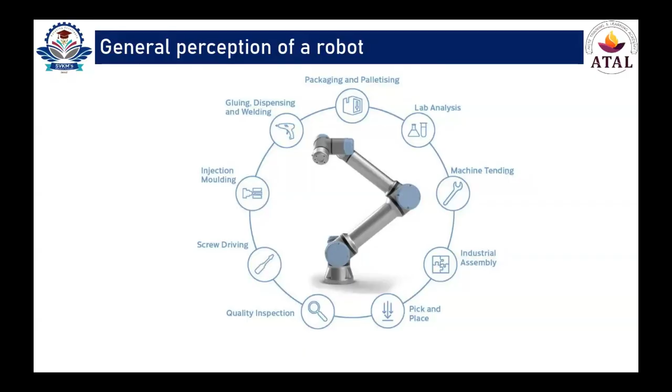The reason is that we humans are a particular kind of fish, a selfish kind of fish. We are very much selfish about improving the productivity, improving business operations, and ultimately improving the profits. And that's why we are studying these technologies even today, and that's why they are relevant even today, even if it is a technology of old ages.

All the corporations are trying to reduce the cost of production and improve the productivity of the workers or overall work environment, consequently increasing the profits. So that's why they are focusing on these technologies. But why now? Because now there is support from the intellectual community in terms of hardware upgradation or software upgradation, and the technical and economic viability of such solutions. That's why this particular science is gaining momentum.

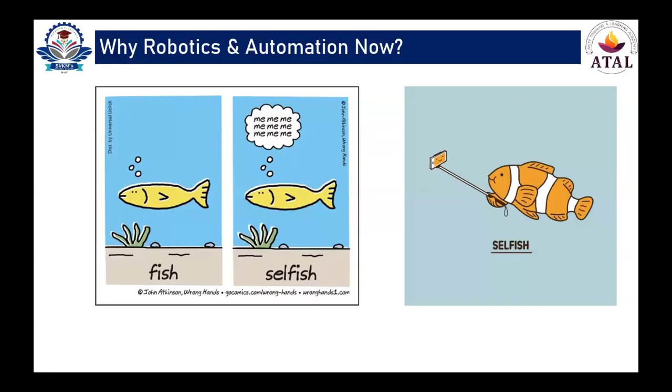If we talk from an industrial or market development perspective, the industrial robot market is now booming at the rate of about 14.2%, as identified by Fortune Business Insights. So progressively, it is supposed to go from the present value of about $20 billion to about $55 billion in 2032. Mainly, this is supported due to the rise in the logistics sector.

We humans are becoming more and more consumers. We are consuming so much, as can be seen from our orders on Amazon, Flipkart, Zepto, Blinkit. And because of that, this technology has been benefited directly and indirectly.

When we talk about industry development, ABB has introduced a new IRB 1090 education robot, which has been particularly designed so that employees can be trained in industrial plants, so that their employees can have a competitive advantage. Everybody has understood the technology game, that whoever has the better piece of technology will excel in the market. So that's why everybody is trying to train their manpower as well.

When we talk about various applications, they can be pick and place, welding and soldering, material handling, assembling, cutting and processing, as well as other applications.

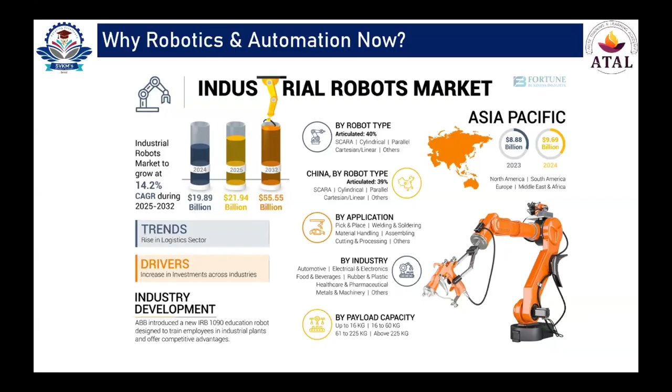At the end of the day, it's the profit that matters for the organizations. So they want to enhance their productivity by deploying a mechanism which will follow rules and principles. And that's why robotics is advantageous.

First of all, it will reduce the cycle time, which you can always optimize. It is not prone to human errors. It will provide better production accuracy, and also better precision.

Just a few moments ago, we said whenever there are repetitive tasks, robots can really help replace the workers, because the human mind has a tendency of making errors when tasks are repeated a few more times. To achieve better precision, particularly in an industrial environment where a mistake can cost money, as well as in certain scenarios even cost lives, robotics is beneficial.

When the parameters of the production or application are set, the robots are much better able to achieve the accuracy.

Then the robots, when trained with AI models which are the buzz nowadays, can be very helpful to ensure decision making is based on the data which is available, instead of the judgment of a person, or cognitive biases, or the thought process of the person. So that rational decision making will definitely help in improving the productivity of the organization as a whole.

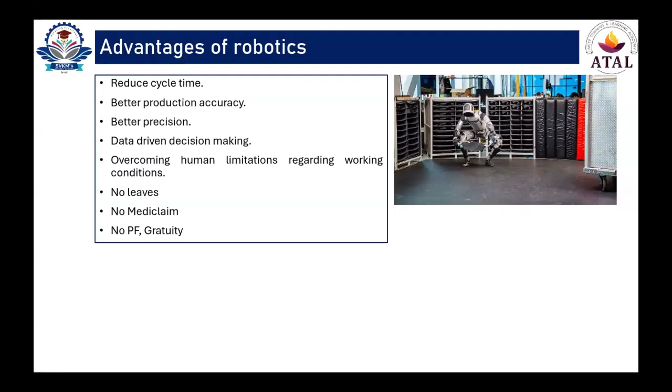When we talk about the disadvantages, first and foremost, robots will have higher power consumption as compared to scenarios where human beings are operating in that industrial environment. This power consumption can mainly be attributed to their increased requirement of processing, which we will discuss in subsequent slides, because they need to process a tremendous amount of data to decide the further course of action or movements.

This power consumption will directly put strain on our important fossil fuel reserves, and ultimately the environment as a whole. That's why there has to be a particular judgment regarding the deployment of robots, taking into consideration both sides of the coin. This energy consumption will result in accelerated depletion of fossil fuel reserves, excessive consumption, and stress on the grid as well.

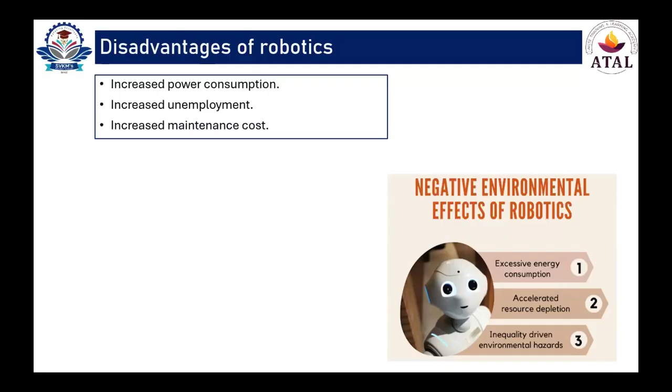Now we'll talk about focused applications of this technology. It's a very good technology, but there are particular applications where it can be immensely helpful, like stacking products in a warehouse. This is a repetitive task, and there's also a concern of ceiling height, so reaching such heights might be dangerous for human beings. In those cases, robots can be immensely helpful. Even forklifts are useful for this purpose, but robots can always improve the accuracy of the stacking process.

Then there's sorting of parcels and baggage that we see in the airport. This is one of the dedicated functions that can be achieved by robots.

Then welding of critical components. We have seen one such robot in one of the vendors of John Deere, right here in Nasik itself. A component is critical in the sense that the welding angles are very deliberate and very important.

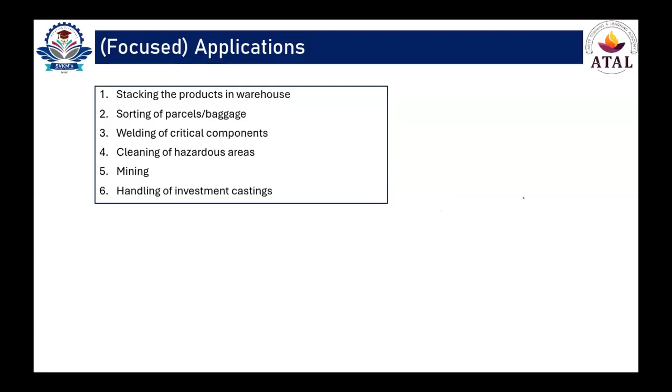Next one is mining. Yes, just give me a second.

Particularly in the case of mining operations, whenever there is a coal mine, methane is usually in the vicinity, and it creates a dangerous working scenario for people inside the mine. Ventilation is very much inappropriate and insufficient for human beings.

The working conditions are not good. The heat, temperature, humidity are all there. So in such scenarios, if instead of a human being we deploy a robot, other concerns are eliminated and the productivity of that mine can be improved.

Then the sixth application, which I mentioned previously, the handling of investment casting, which are very costly objects. At the same time, their dimensional accuracy cannot be compromised due to their intricate nature. So in such scenarios, the robot can have a focused application.

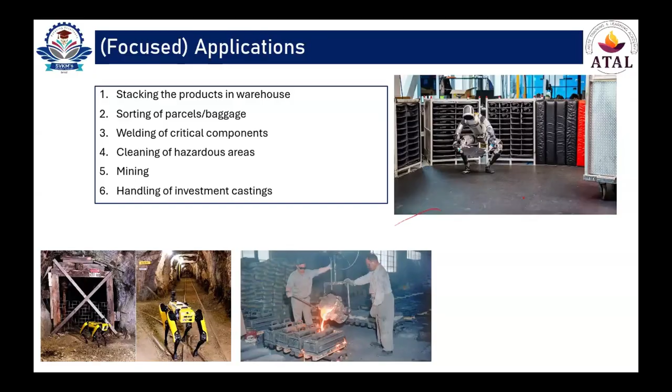This is one particular application wherein in the old days, the ladle of a melting furnace was being handled by human beings. The working conditions are not very humanitarian, and they need to handle a very risky job. So such pouring operations or handling the ladle can be taken care of by robots.

Yes, this is just a picture of sand casting, or a sand core from an investment casting factory.

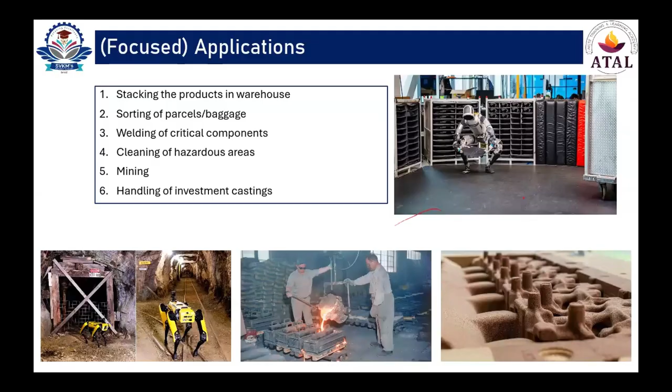Now the robots are being focused so that the manufacturing ecosystem can be disrupted or affected. So the machinery industry over time has followed various trends, like the first one being disruptive technological trends in the form of additive manufacturing through 3D printing, generation of new materials, or e-mobility.

Now the growth patterns are slightly shifting. There is increasing competition from Asian players. Previously China was a major player in the manufacturing industry, and now it is also being compensated. A few years ago it was also Bangladesh, and now Vietnam and Indonesia are taking a lead in this manufacturing environment.

The organizations themselves want to transform so that they are able to provide more flexibility, agility, and customization, and at the same time the customer needs to be very much satisfied with the products as well as services. Digitization is happening at a huge pace due to Industry 4.0 as well as the Internet of Things, which are enablers for future hardware sales and new digital businesses. Such digitization always needs a speedy supply chain system that can be accelerated through these robotic inventions.

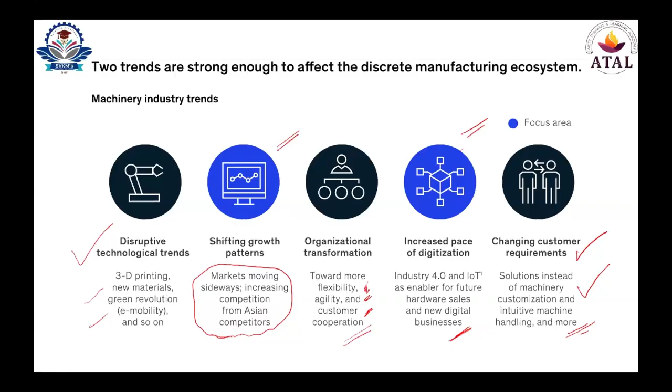So robotics and automation can definitely supplement these requirements due to their higher possibility of delivering accuracy, and they are very agile and flexible. You can put them in any working environment, and you can reduce the time of their training or coding, given their adaptability to diversified working environments. So if these two strong trends play out well, the manufacturing ecosystem can still be disrupted and shifted to a higher dimension.

One of the examples is this, that robotic coal mining is gaining so much momentum, as we can see from the number of total patents being issued to these organizations. The most prominent one being Komatsu, then followed by Sandvik, Tian Di Science and Technology, Caterpillar, China Energy Investment, Shanxi Tiandial Mining Machinery, and then Tiandi Shanghai Mining Equipment Technology, Deere & Co, Famur Group.

So these organizations are aggressively working on robotic coal mining to reduce artisanal mining as much as possible. This is beneficial from both a market making perspective as well as the humanitarian perspective, so that the same manpower can be utilized somewhere else with improved skill sets.

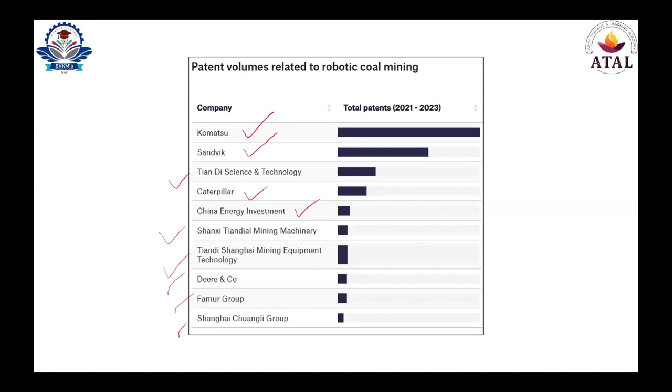Now, still the question is there: why robotics and automation now? There are mainly these momentum factors. There is a surge in investment and innovation. The robotics sector is attracting significant investments as compared to the past progress. Then AI foundation models as robotic brain power have been developed, and more importantly, they have been supported due to the hardware being developed by various organizations such as NVIDIA or AMD.

So these hardware breakthroughs have helped extensively to accelerate the mobility and dexterity of these robots. Then these robots have very nice compatibility with human-centered spaces, such as even nowadays Tesla is working on domestic help robots, which will be able to help older people in the home whenever their loved ones are not nearby.

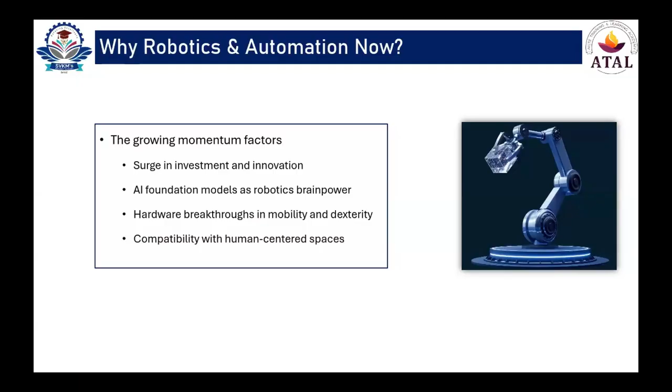Let's discuss them one by one. The first one is surge in investments and innovation. If we simply look at the market capitalization of S&P companies, there has been a huge gain in the market capitalization of AI-focused S&P 500 companies. Even the startups focusing on the theme of robotics have been receiving significant amounts of funding over the period of time, and it has surged significantly.

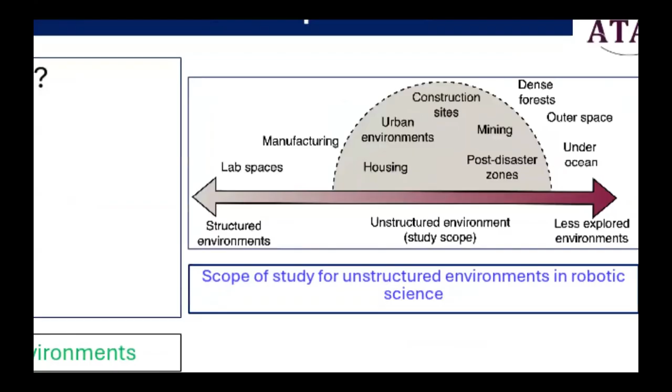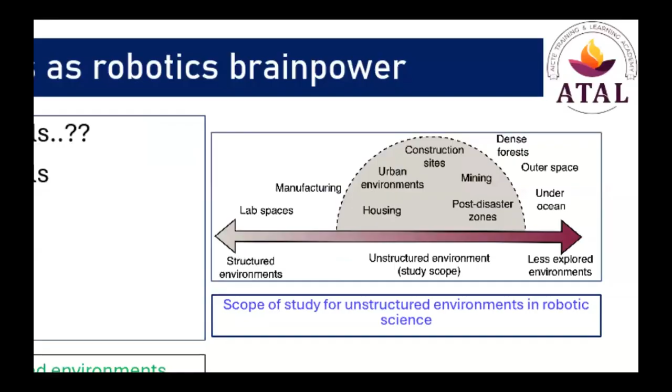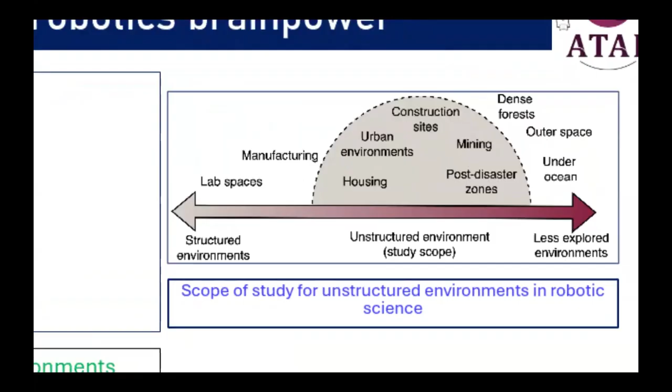When we talk about the foundation models, they help with generalized understanding, multimodal integration, natural language interaction, perception and reasoning, and adaptability and generalization. So, when we consider these aspects, as the working environment of the robot becomes more and more unstructured compared to the environment in which it was trained to work, it strongly needs the support of these AI models so that it can learn from the environmental variables and afterwards deliver

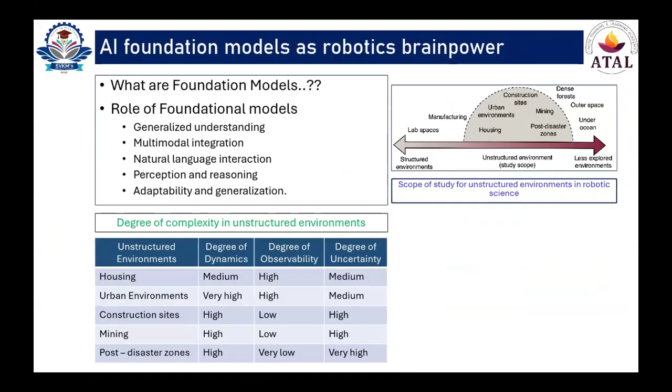a solution which is suitable, which is sensible for these unstructured environments. The robot may get trained in the lab, but it might be subject to working operations which are very much unknown to the lab training. So there has to be adaptation, and the learning curve needs to go forward in this case. If we talk about the complexity in the housing environment, the complexity is not much. Degree of observability is high.

Hello, sir. You are not audible. Hello. Sir, you are not audible. Hello. Dr. Thakre, sir, you are not audible. Hello. Dear participants, please stay tuned, there might be some network issue at the speaker's end.

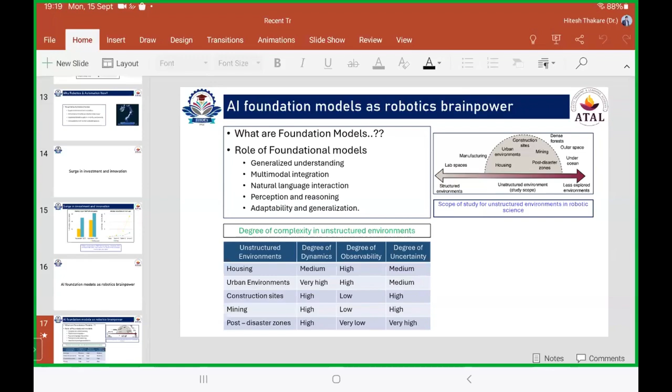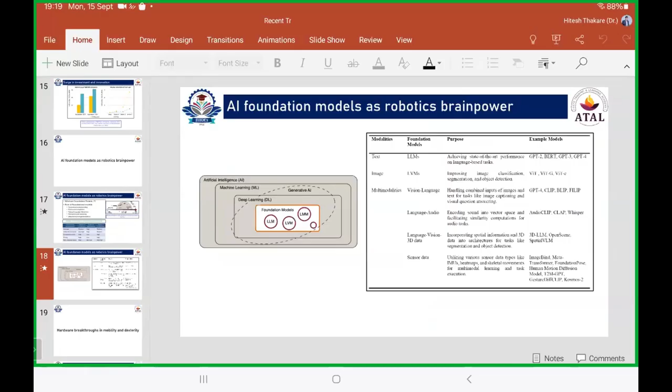There can be various large language models, or vision models, or multi-mode models which are facing multimodalities. LLMs can simply function on the modality of text, so that they can achieve state-of-the-art performance for language-based tasks, such as the models that we have today, ChatGPT 2, ChatGPT 3, 4, even to some extent the recent one, ChatGPT 5, which is actually a downgraded version of a previous ChatGPT. Then judging about the image, like the classification, segmentation, object detection of the image, models are available for that.

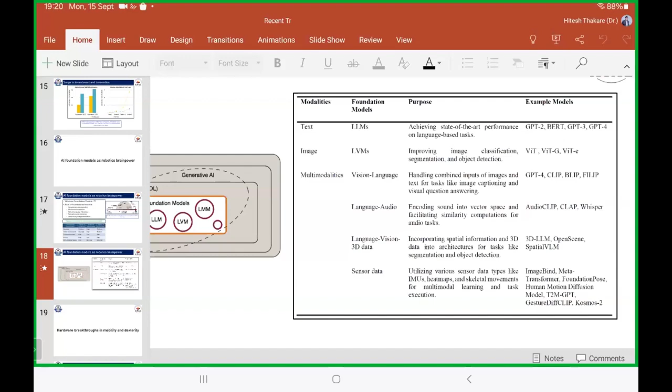For other modalities, such as vision language, meaning if the robot is subjected to combined input of images and text, such as captioning the image as well as answering a visual question, then the model needs to be enhanced and improved. There can be language and audio kind of modality, wherein the robot may need to encode the sound, and afterwards that needs to be processed so that the robot can deliver the desired output. The robot might need to take data from various sensors, even heat maps or skeletal movements, so that accordingly the multimodal learning can be completed and tasks can be executed.

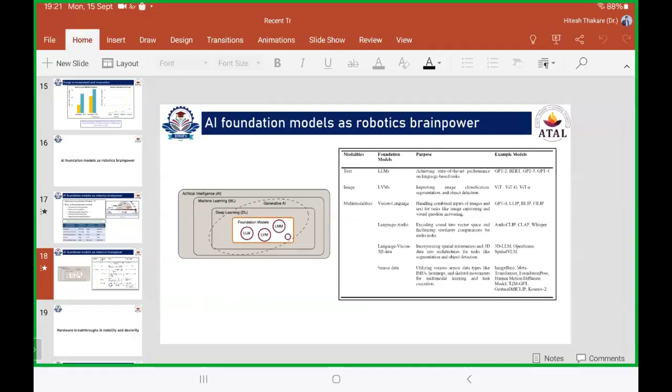So, in essence, whenever we are talking about robots, we are not just talking about a mechanical assembly. We are also talking about the brain behind the mechanical assembly.

The foundational models are getting stronger day by day. So progressively, they will be assisted by deep learning technologies and then generative AI technology. Consequently, AI and ML will take over, and after some time, robots can become autonomous. They will be so good at learning and training themselves that their applicability can be enhanced.

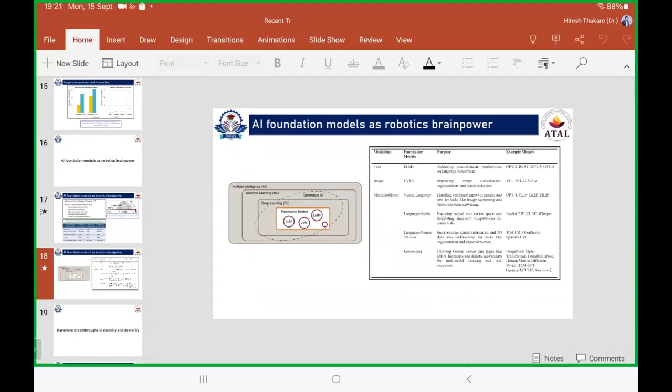This cannot happen without hardware breakthroughs. Whenever the robot has to process humongous amounts of data or complicated data, that computational power should be available, because whenever a robot is subjected to a real life environment, it might be bombarded with several variables from various sources, known or unknown. There can be sound, visual input, commands received from its operator, or decision making requirements based on the situation. So for this purpose, hardware breakthroughs are very much necessary. Without stronger hardware, the software, processing and computations are not possible.

One of the examples of this is the recently developed processor by NVIDIA. Previously, they had the NVIDIA Orin, which had an operating speed of 275 tops. Now, can somebody from the audience please tell me what tops is? You can even Google it if you are on the machine.

Tera operations per second. Trillion operations per second.

So those many operations need to be done per second if the robot has to perform productively, if it has to process all the data. Even the NVIDIA Thor was 8 times more efficient and effective compared to the last generation for multimodal AI inference. Whenever AI is running on these devices, it will need this kind of support.

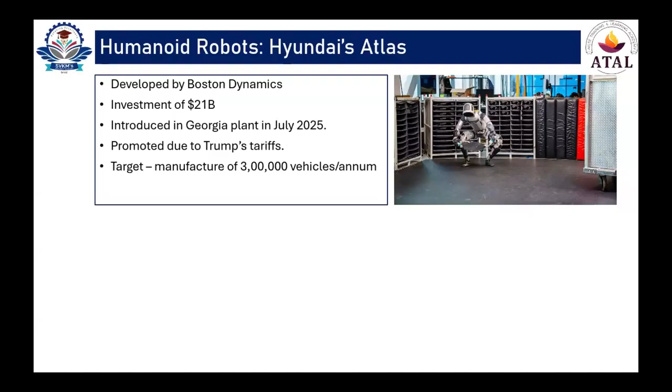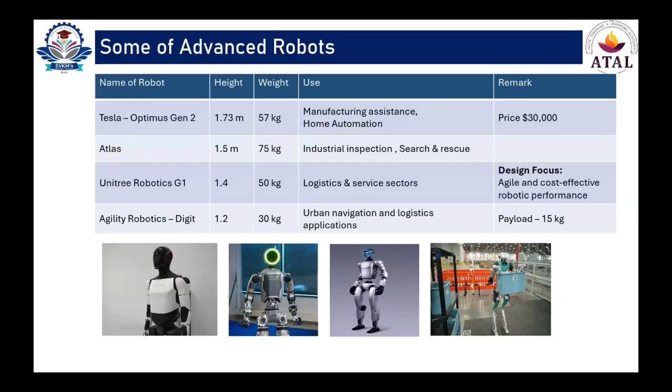One important aspect regarding sustainable development will be the energy consumption in robots. As of now, robots are being subjected to a variety of applications or operations, so estimating their exact energy consumption is very difficult due to variation in scale and complexity. But the backend of the robots matters, because at the end of the day, a robot is hardware functioning through directions from its brain, which is nothing but software or its AI model. So even a domestic help robot is going to capture data, process data, and store the data collected on a day-to-day basis, so that future decision making can be improved or enhanced. This is an important aspect, particularly when we are facing such a shortage of energy in our day-to-day operations, so it becomes important to ask whether this is really justifiable or not.

So if we see the change in perspective that International Federation of Robotics has observed, if we focus on this.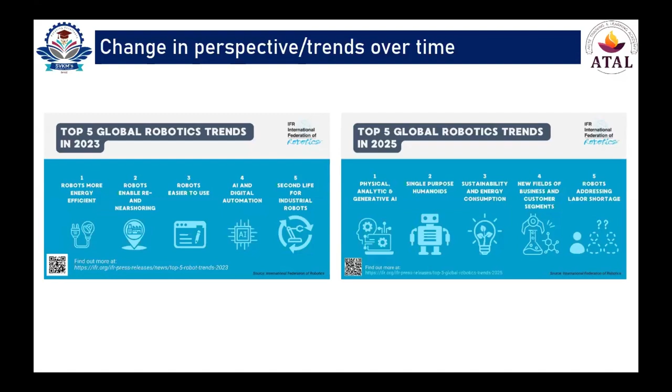Sir, please confirm that this zoom-in is visible to you, and that I have zoomed in on one side of the picture. Yes, sir. Yes, sir.

In 2023, the top global robotic trends were related to energy efficiency in robots, nearshoring of robots or easier to use AI and digital automation, and second life for industrial robots, which may be part of the circular economy.

In 2025, there are advancements in trends like physical, analytic and generative AI, or focusing towards single-purpose humanoids. These are robots which will appear like humans and will be dedicated to some particular task, just like Hyundai's Atlas that we saw a few moments ago.

Then sustainability and energy consumption is a primary focus. There are new fields of business and customer segments which can be taken over by robots by replacing human labor, and whether robots can help address the labor shortage. These are the key trends identified by the International Federation of Robotics.

So in that, they have given significant emphasis on sustainability and energy consumption, which will arise due to the adoption of robots.

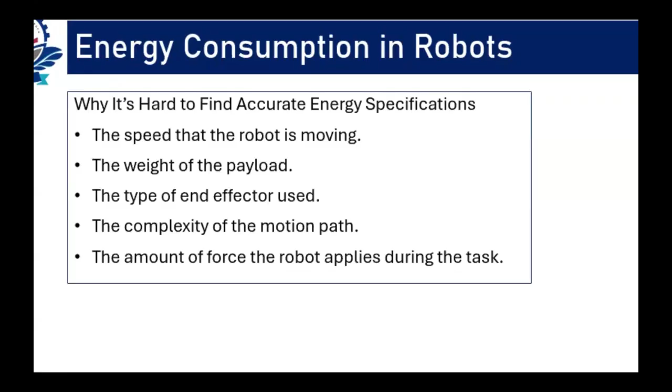Now, the energy consumption in robots, it is not impossible to estimate, but as of now it is difficult because of variation in the speed with which the robot is moving, the payload variation or the type of end effector used, how complicated the motion path is, and the amount of force being applied by the robot during the performance of the task.

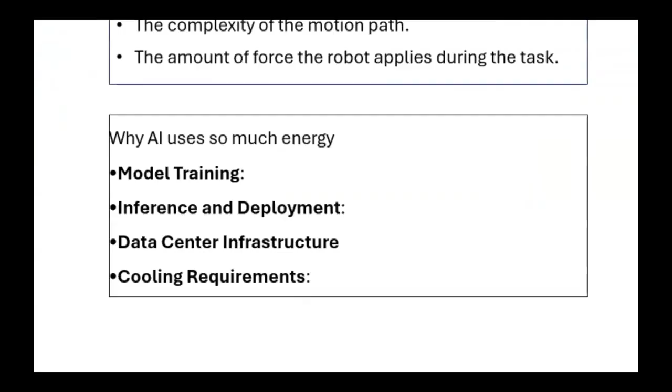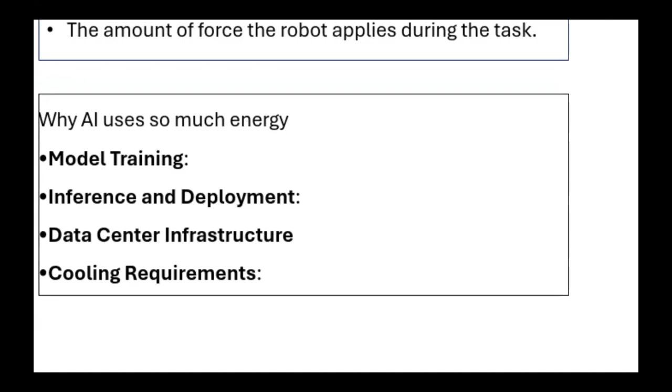At the same time, this is the hardware part and this is the software or brain part. The AI running that robot, or the code running the robot, along with data collection if it is happening, then model training, inference and deployment, infrastructure for data centers, as well as cooling requirements to ensure the efficiency of the chip or hardware. All these are going to consume a tremendous amount of energy.

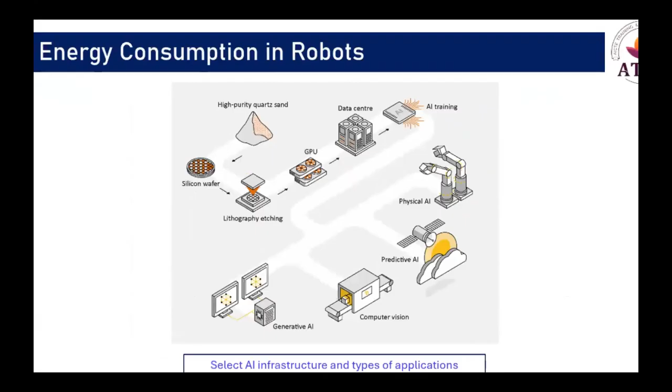When we talk about a simple robot, it is one important part of the AI infrastructure. Right from the extraction of high purity quartz sand, converting it to silicon wafer, then lithography, converting it to GPU, data centers, and then training the AI models through software coding, and then its multiple applications such as physical AI, predictive AI, computer vision, or generative AI. So the robot itself is one element of this AI infrastructure.

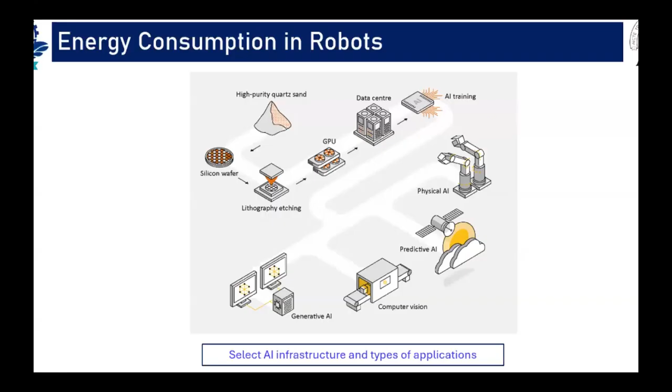So it is going to get affected whenever this AI infrastructure is susceptible to energy consumption.

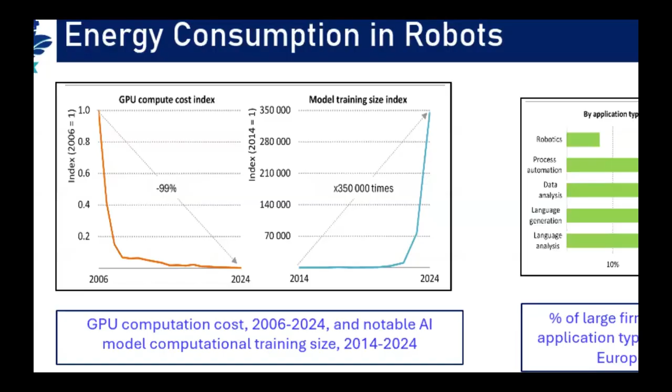If we observe the energy consumption trend, the cost of GPU computation has progressively reduced compared to its predecessors, while the model training size has improved consistently, especially after COVID, due to improvement in hardware support, which has led to an improvement in the model training size index.

Apart from that, we can also see that more and more firms are using AI, maybe for process automation, robotics, data analysis, language generation, language analysis, or for various business functions such as R&D, ICT security, logistics, production, marketing. Progressively, these consumptions are going to increase, which will put stress on natural resources and initiate accelerated depletion of fossil fuel sources.

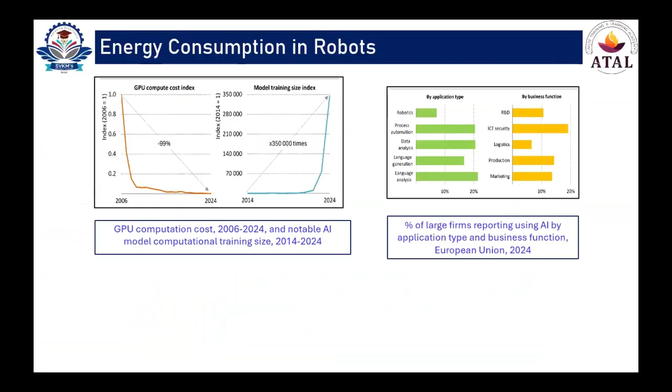One of the appreciable initiatives is by ABB, which has about 13 to 15% global market share in industrial robotics. They have developed an ecosystem wherein robot users or organizations can monitor and benchmark energy consumption, or optimize the energy consumption of the robot, claiming about 30% energy saving is possible when their recommendations are followed by organizations.

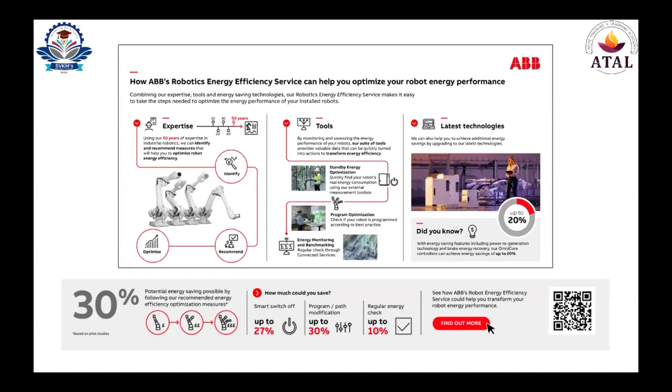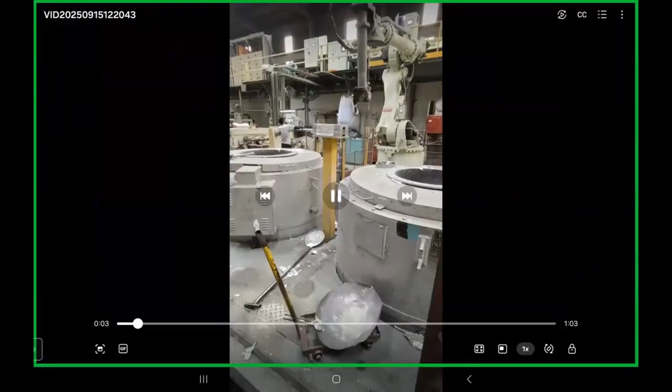Okay, I think my screen is visible. I wish to show one small video of today's industrial visit.

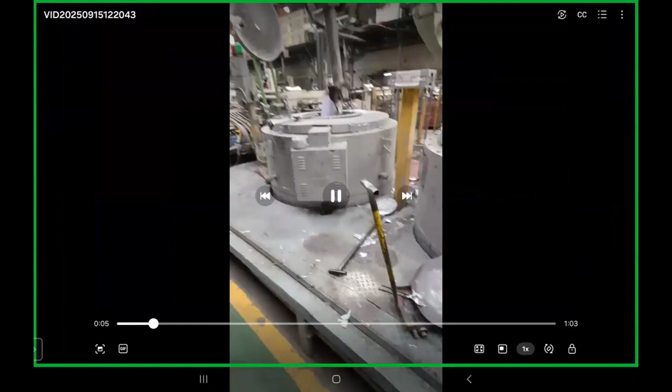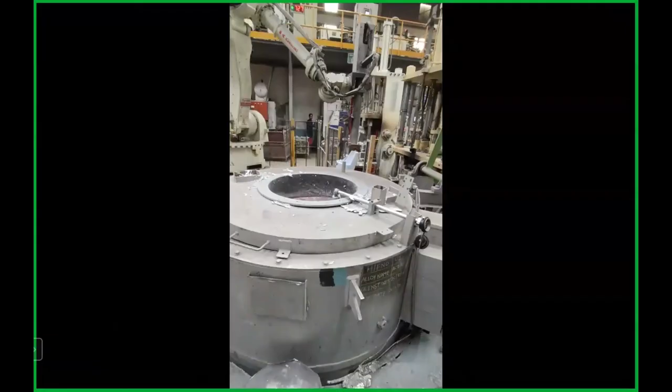These are the storage furnaces wherein liquid metal is kept so it can be put in the required application. Now it is being taken by the robot and it will be poured into the mold for that particular product. It's a simple casting industry in India itself. This is a high temperature working environment, and now that job is taken care of by the robotic arm.

The organization has already deployed 5 robots - 3 by ABB, 2 by Kawasaki - and they are planning to put in more and more robots. This is a gravity die casting operation.

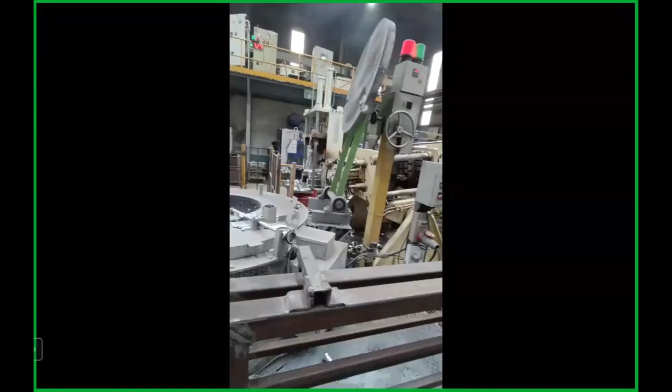I hope the video was visible to everyone. So those are my two cents. I'm thankful to Dr. Yadav sir, Dr. Pawar sir, and Dr. Rane sir for providing me with this opportunity of sharing whatever little I knew about the topic in front of this eminent audience. Thank you.

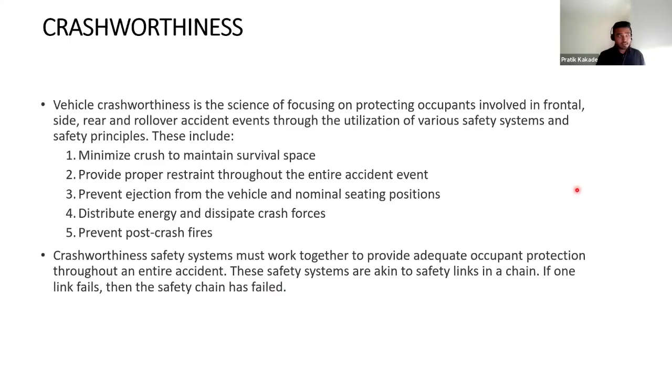So the next thing is why it is important that we need to look into safety systems. Generally, I have seen most people don't wear seat belts. Most people, if using a bike, don't wear helmets. And why is that? We are not much aware about our own safety.

And looking at India, there are a lot of automotive companies coming in. There are a lot of cars on the road. The roads are not getting wider, but there are a number of cars coming on the roads a lot. So there is a high chance that this risk factor has been increasing day by day.

And that's the reason we have few regulations. So in that case, we have a seat belt reminder. We have a lot of safety features that are included in our vehicles. And that is really important because of these reasons.

So if we look into crash and safety, there are two types of safety systems: active safety and passive safety. In case of active safety, these are all the features that come before the accident happens. These are features that avoid the accident in the first place. You have all those systems incorporated in your car, which would make sure that you don't go and hit something, or there won't be a case of accident.

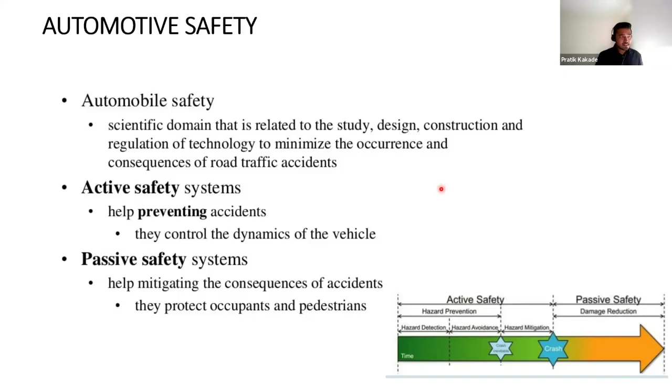Okay, that's great. A lot of responses. Really appreciate that. Let's go to the next slide for all the systems of active safety.

So these are all that you have considered as active safety: anti-lock braking system, somebody has already mentioned; traction control system - if you are moving on a wet surface, there is an ECU system that controls the rotation of tires, which doesn't let you slip on a wet or muddy road; stability control, cruise control, lane assist, steering control, suspension control, road sign detection, intelligent speed assistance. So these all come into active safety.

Hope everyone is aware of these. Change of headlights according to the road turning - yes, correct, that is also a good example.

Now, what would be an example of passive safety? Some of you have already answered a few - seat belt was one, airbag was one. What are other passive safety systems that you consider, like, if the car is in an accident, that prevent the occupant from getting injured?

Crumple zone, correct, that's good. Engine drop, yes. Any more? Body frame, yes - but not the complete frame, there are certain parts in the frame used to do that. Reinforced vehicle structure, okay, yes, in a way that is also passive safety.

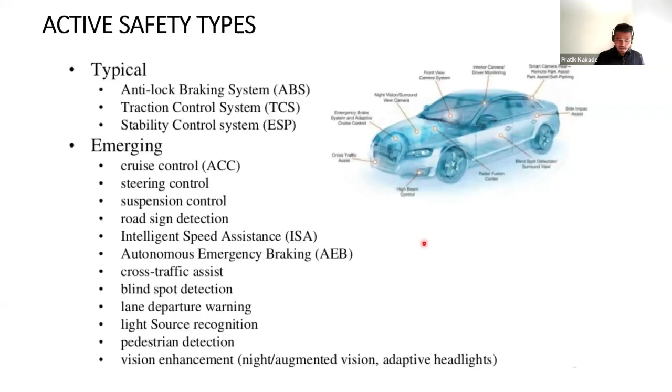Moving to another slide. Seat belts are compulsory. Yes, seat belts are compulsory.

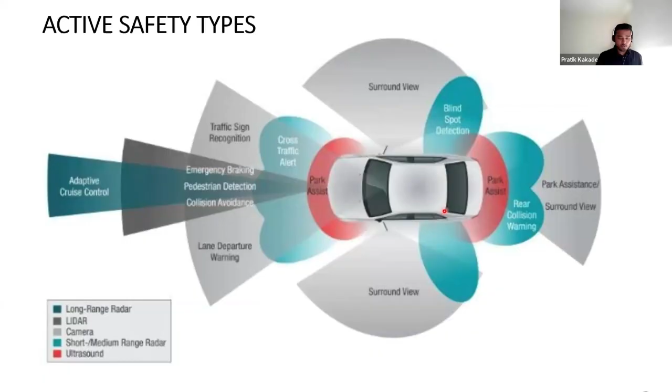Other things in active safety are adaptive cruise control, emergency braking, the sensing systems, parking assist, and the radar system—all of these come into active safety. Whereas seat belts, airbags, body structure with programmed deformation, and retractable steering column all come into passive safety. That's why both of them are important in avoiding accidents.

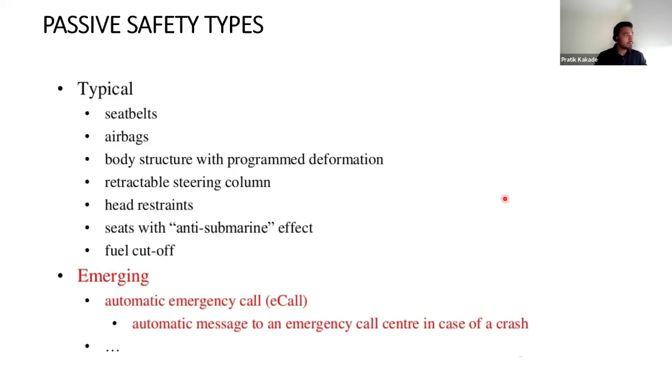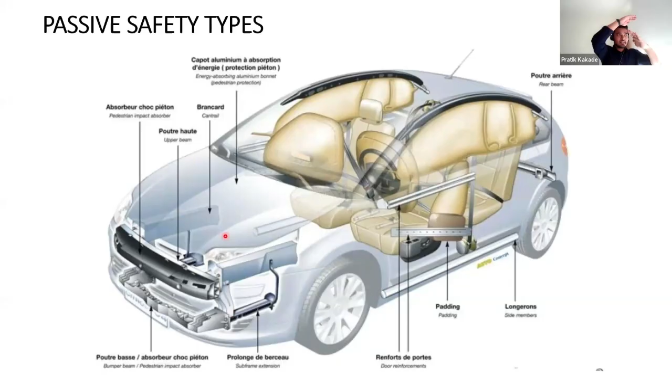This is one of the concepts, if you're not aware: if a car hits a man walking on the road, the bonnet would pop up, so that when the head comes onto the bonnet, it would be flexible to avoid that head from getting injured. That is one of the passive safety features we have. And there are crush cans, front bumper beams, etc., just to absorb as much energy as possible.

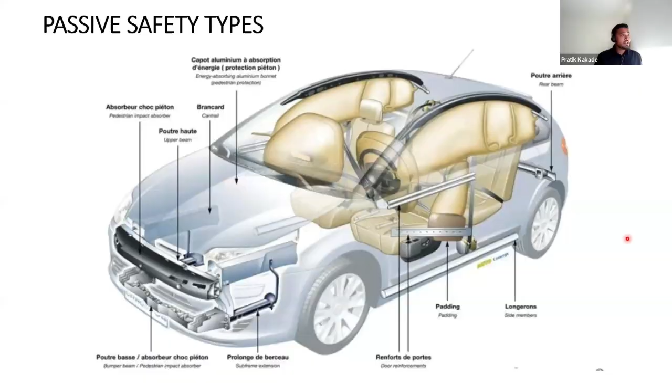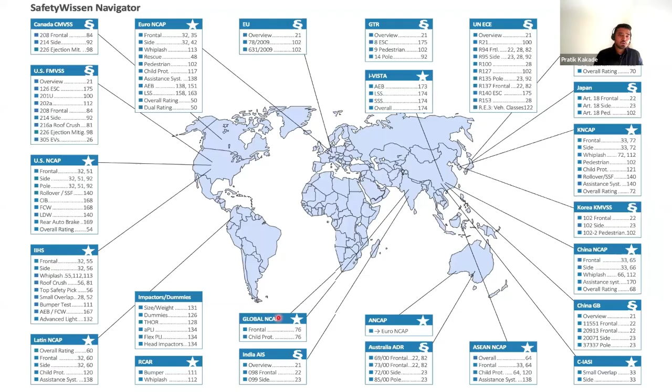So you have US FMVSS, Federal Motor Vehicle Safety Standard, that is one of the governing bodies. And there is NCAP, which gives you star ratings. You must have read that Tata has a 5-star car, or Mahindra got a 5-star car. These star ratings are specific to a particular country. US has their own star rating, Europe has their own, China has their own. Each country has its own star rating system. I think India will be launching their star rating this year or next year, I'm assuming. But for now, they are testing with global NCAP, which is followed by countries who do not have their own NCAP systems. Just to give you an awareness of all the regulations.

So there are three types of regulation. One is legal regulations. This means that if you do not satisfy their criteria, you can't launch that car in their country at all. So it's really important that you satisfy the criteria of the legal requirement.

Consumer and insurance ratings are not mandatory. For example, if your NCAP rating is not 5-star, if you're getting 4-star, 3-star, or even 1-star, but you are legal, then you can still launch your car in that country. These are not mandatory, but companies try to achieve as many star ratings as possible. And there are agencies called insurance agencies.

Unlike India, in countries like Europe and US, the premium of car insurance depends on how the car performs in insurance ratings. For example, if you're parking your car and you hit a pole or a wall with your bumper, and the bumper gets damaged, the replacement cost of that bumper, or how many parts are damaged in that test, decides the insurance premium of the car. These regulations are important for automotive OEMs, because otherwise the car won't be sold in that country, or people would prefer lower insurance over higher insurance. So this is also important.

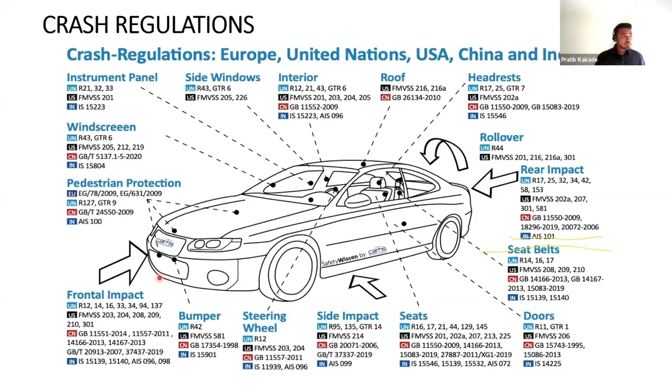Just to show you, for a legal car in the USA - I don't know whether you can see the numbers, but I'll point them out - there is first a 56 kilometers per hour flat frontal test. If a car is moving at 56 kph, there should be no injuries to the occupant or passenger. There are dummies specific to male, female, and kid dummies, all tested in these. So for the US, there are a lot of requirements in front crash: 56 kph, with seat belt and without seat belt test cases, an angled plane, and also an offset test.

Offset is present in all the regulations. Offset means that if a car is coming head-on and you are driving, there is an offset or overlap of 40%, so that 40% impact happens. This test is mandatory for US, Europe, Japan, China, even India. As you can see, in India there is no regulation for frontal crash. So a car sold in Europe can be applicable in India, because we don't have any requirement for full frontal crash - we just have a requirement for offset impact.

And that is the only legal requirement with respect to front. And with respect to side, you have a 50 kph side barrier test.

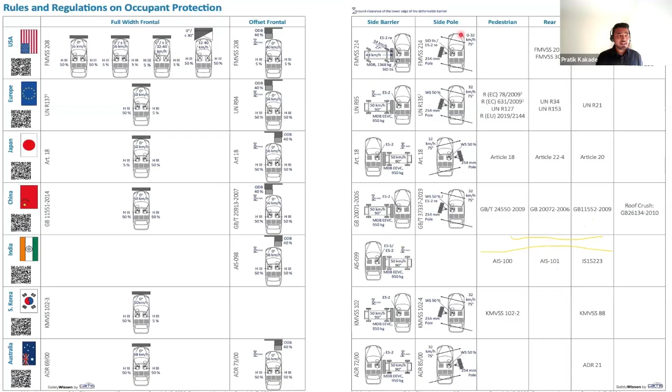These are minor test cases. The major test cases are front, offset, and side barriers, so these are really important. Apart from this, there are slightly stricter ones, which are NCAP, where your star ratings are decided. These are on top of the legal requirements.

So legal requirements are sometimes easy for bigger companies like JLR, Mercedes, or BMW. For them getting a legal pass is quite easy because their cars are quite wide, they have quite good design structure, and they are expensive as well.

The trick is to get a 5-star rating, and this is really difficult because the criteria for 5-star is quite stringent compared to the legal ones. They have a lot of test cases, and each country has a different test case.

So if you look at cars launched in Europe versus America, there is a huge difference inside. The car on the outside may look quite similar, but inside there are components which are quite different for US versus EU and other systems. So all these test cases need to be qualified to get good 5-star ratings.

Does anyone have any question regarding this?

Okay, so global NCAP, I'll just show one second. These data are freely available online. So if you go to Euro NCAP for example, there is a Euro NCAP website, and you can see all the cars with their star ratings.

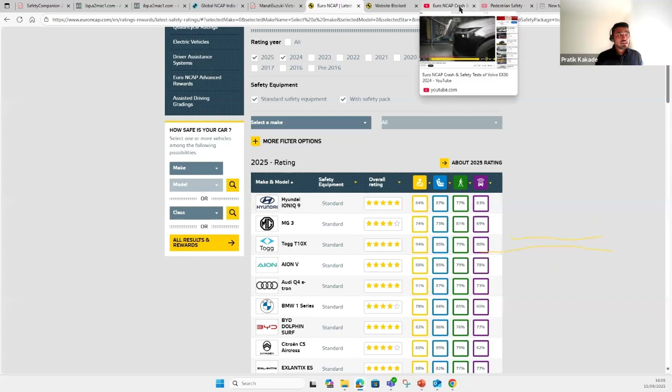Sorry, the website is blocked for me, but you can view it on YouTube as well. So for example, this is something called leg impact.

Now leg impact is divided into two aspects. One is pelvis, which is your hip bone, and this impactor represents a hip bone. And there is another where it is the complete leg of a pedestrian, a person crossing the road, from hip until the foot, you will have another impact.

I'll just show you a video, look into it. So you have certain requirements in this case to qualify.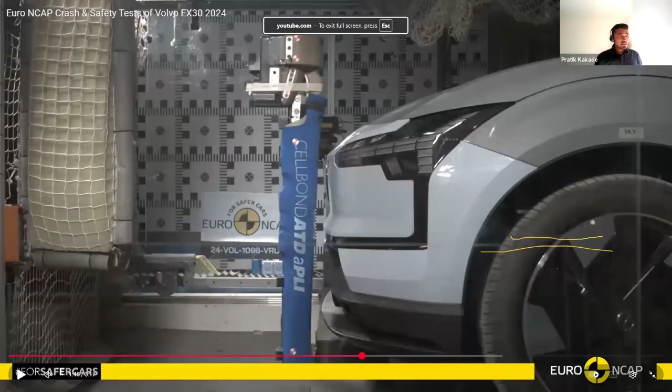Yeah, so this is the pelvic block, like hips, and in the center, if you can see my cursor, that is the knee section. So this is all your femur or thigh portion, and this is all your tibia and calf section, and this is also hitting at 40 kph.

In this case there is no force criteria, but all you check is the ligaments at the knees, the femur bone and the tibia bone. You check the movement of the bones so that they don't get injured, that is all we test on this impactor.

Just to show you the video, this is what happens to a person when he is hit by a car, and this is all in slow motion. In actual, if you want to see the actual speed at which it hits, this is how fast it happens.

It's just quite small, it happens in just 15 to 20 milliseconds. That's how small the span is. You can understand how important it is - assume in 15 milliseconds, you have to understand how the part compresses, how much energy it absorbs, and the person's leg should be safe. That is how critical it is to design bumpers so that they take the energy in that small time without damaging your leg. That is the kind of CAE simulations that we do.

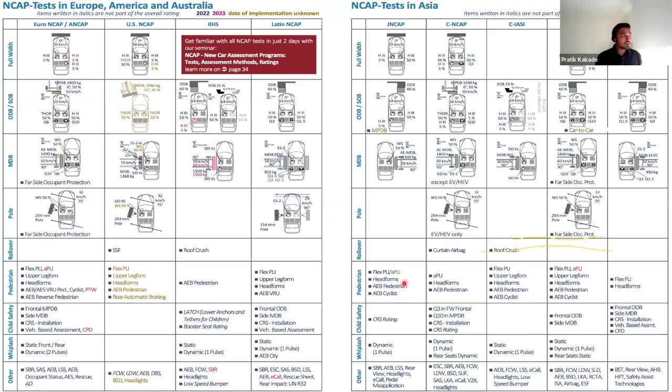Going to next slide. We have global NCAP. This is where our cars are tested. Our Indian cars don't test in Euro NCAP. In general, Indian cars are only tested for global NCAP. And when you read the regulation, global NCAP is not that stringent. When we say we are getting 5-star ratings, you can't compare a 5-star rating for global NCAP with the 5-star rating of Euro NCAP or US NCAP.

Because if I take Maruti Suzuki's Victoris, it's getting 5-star. This would just perform 1-star or 2-star in Euro NCAP. So that's how lenient the global NCAP is.

Does anyone have questions? Sorry, I heard some voice. It's just a background noise. Okay.

So you can see these sheets as well. Download fact sheets and all - you can get those sheets. They'll show you how much each of them score. So when you're applying to buy a car, you can see the frontal airbag - yes, it is standard driver. Yes, it has. So all these details are given.

Do look into it because safety is really important. When you're buying a car, you need to have a car which makes sure you would be safe in case of any fatality. That's really important - not something you would normally think about. I met a few people who said that once the airbag is deployed, it is of no use, so they don't want an airbag. But that one deployment saves your life. You should not think like, once it's deployed, I need to put another airbag and that would cost so much. It's your life against the cost of an airbag.

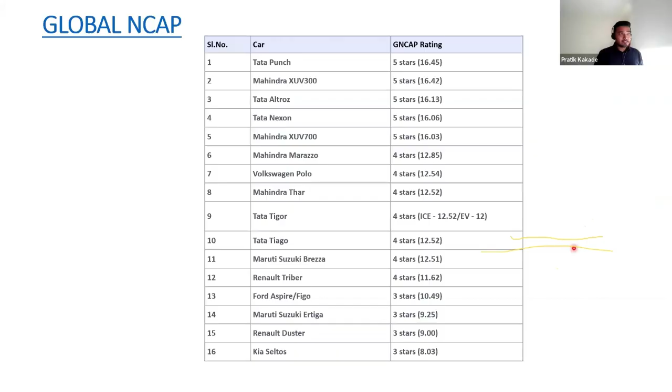So make sure when you buy a car, you go through these ratings, read those, understand how they perform at different speeds and different impact possibilities, and make sure your car is quite safe driving on Indian roads. Okay, so this is all about crash and safety. I hope I haven't bored you enough - I mean, everyone is awake. Maybe a reaction would be good if everyone is okay for me to continue further.

Yeah, cool. Does anyone have any questions? Participants, if you have any queries, you may ask. I think no, sir, you may continue. Okay, that's fine, completely fine.

Okay, so all what you have known before was crash and safety. I was just giving you an understanding of how that market or that particular domain works. Now this is related to actual job profession - this is something that if someone is interested, some of the students, yourself or some of your students are interested in these careers, this is something they need to be aware of.

In crash and safety testing, one thing is that once the car is built, you test it actually with the barriers and all. That is quite a later stage of the development process, whereas there is the initial development process where you create a CAE model and test based on your CAE material card, CAE data, etc., and try to develop a car initially itself which would be compliant, and then you do smaller or lesser tests on the actual car. So that's the role of a CAE engineer, first of all.

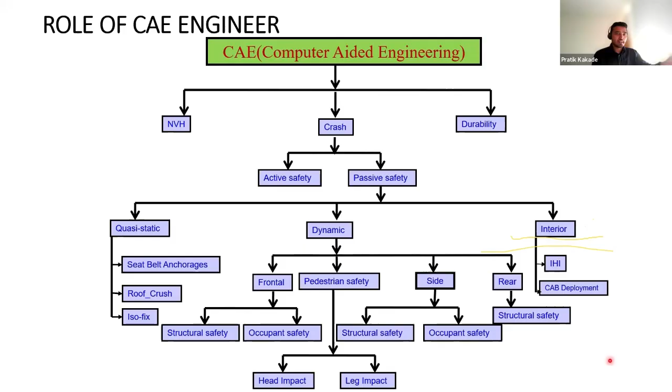So these departments are quite specific. You can select any one of them and make a career in that. So you have a lot of departments that you could work in.

This is the general process for any CAE engineer. First is to prepare a model, pre-processing, what we call it. We use Hypermesh most of the time, or ANSA if there are a few companies for durability that use ANSA. This is where you create a finite element model, or meshing, and develop a car with all spot welds, bolts, etc. All doors, windows, everything would be modeled. That is pre-processing.

Then you give boundary conditions, so for a test case, for example, the boundary condition is the car moving at 56 kilometers per hour and there is a rigid wall and it should hit it. Once you create that boundary condition, you give it to the solver. For crash and safety, it's LS-DYNA that we use. There is another software called PAM-Crash used by a few companies, but LS-DYNA is more prominent in India.

This solver would do all the calculations, what would fail, what would not fail, which is not visible to you. It will just run in the computer, do its simulation, and then send out a file. When a file is sent, there is another software to view it, which we call post-processing. Once the solver has given you the result, you open it in software, view it, view the animation, plot the forces, plastic strains, stresses, etc. That's what you report in general.

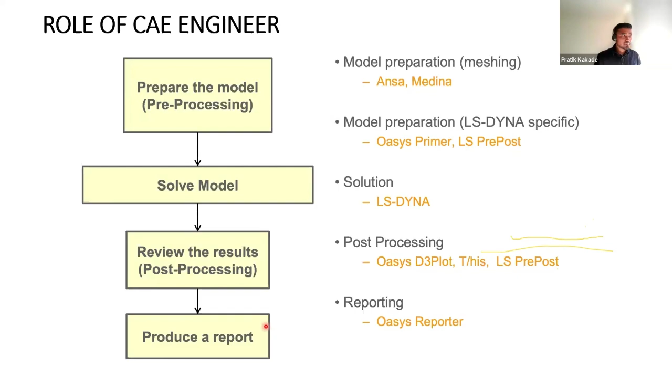Now, this is how we do it. This is all the FE model, what we have.

So you have closures. What do you call closures? It's something that encloses the car, so mostly it comes like doors, bonnets, tail door. That is into closures. We have bumpers, front and rear.

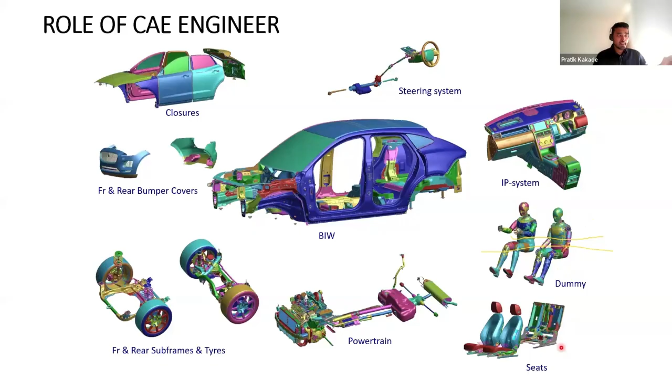Subframes, you have powertrain system, you have BIW system, your steering system, you have IP system. There are dummies as well, you model the dummies for all these test cases. There are seat systems, so each and everything in the car would be modeled. There is nothing that is not modeled which you won't see in the car. Even the wiring harnesses would be modeled to check the effect of it.

I've just made it black and white because this is confidential data, but just to show you, this is how we check. So this is an offset impact, and this is full frontal flat impact on the rigid wall.

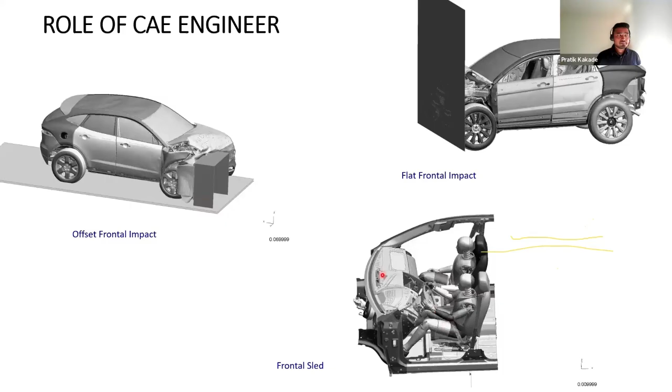And this is to check the airbag deployment and how the human head interacts, how the dummy interacts with the interior system.

For example, when you're taking a turn on a highway at a higher speed and suddenly your tires don't have grip, it slips off and there is a pole or a tree, assuming a tree, it hits on the side. That's the kind of load case that you're testing here.

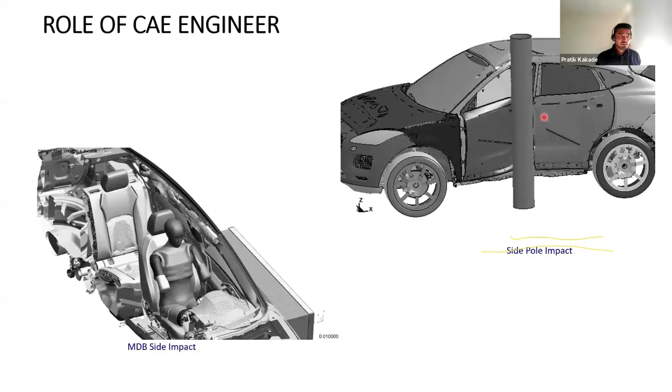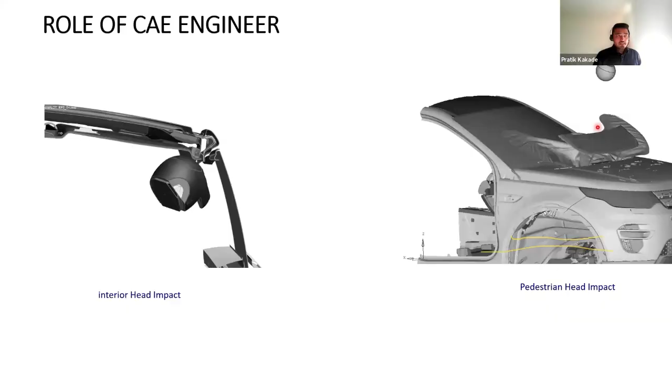Cool. Yeah, so that's all from my side. Does anyone have any questions to ask?

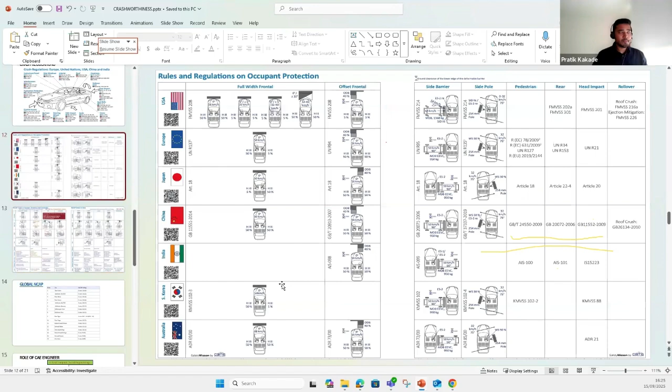Safety is getting quite a lot of attention right now. People would prefer safer cars, at least what I've seen in most of those countries. So there is a high chance these departments would come in flourishing, because in India, as I showed in that slide, we don't have specific regulations for safety in the legal system, which I feel in a year or two would become stringent. And once this happens, there would be a quite need of CAE engineers.

If the college gets those student software licenses at a cheaper price, you can start grooming students in that direction. Even they can give you trainings, because since you're using their license, they have dedicated people who would help you with trainings and other aspects. Yes, sir, we'll definitely proceed with this suggestion.

So, any participant having any queries? I request participants... Sorry, I just read the question from Dr. Tushar. Yes, I have. I'm working in one of those, I mean it is not on road, it is still in development, but yeah, working on EV crash cars.

Sir, I stopped you, interrupted you. Yeah, so I have the session. Question answer session is over.

Thank you very much, Mr. Pratik Kakade, for such a thought-provoking and engaging session. You not only shared your rich professional journey, but also gave a deeper understanding of how engineering, innovation, and safety come together in the real world of the automotive industry. The way you explained pedestrian protection systems, bumper design, and testing methodologies really helped us appreciate the behind-the-scenes engineering that goes into saving lives. Your discussion on safety measures, crashworthiness, and validation techniques opened our eyes to the complexity and responsibility that engineers carry. We especially valued how you highlighted the role of engineers in crash simulation, covering both static and dynamic analysis, and how CAE tools are applied in crash modeling, safety validation, and product development. These insights showed us how theoretical knowledge transforms into impactful solutions that improve safety worldwide. Your expertise in lightweight design, structural analysis, and EV safety has given participants not just technical know-how, but also a vision of how the engineering profession is evolving to meet modern challenges. On behalf of the organizing committee and all participants, we sincerely thank you for sharing your time, experience, and passion with us today.